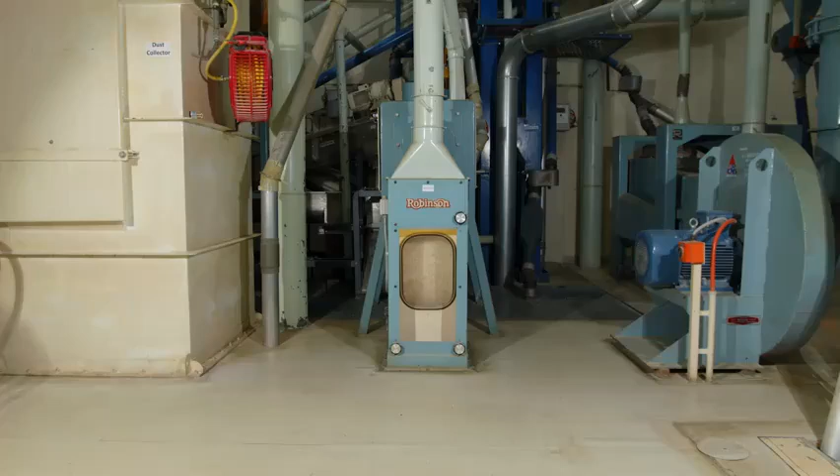Aspirators. In this chapter, you will learn about aspirators, what they do, how they work, different types and how they are adjusted, and how they are maintained. Aspirators are designed to remove lightweight impurities from the wheat. Lightweight impurities may include dust, chaff, and small or broken kernels.

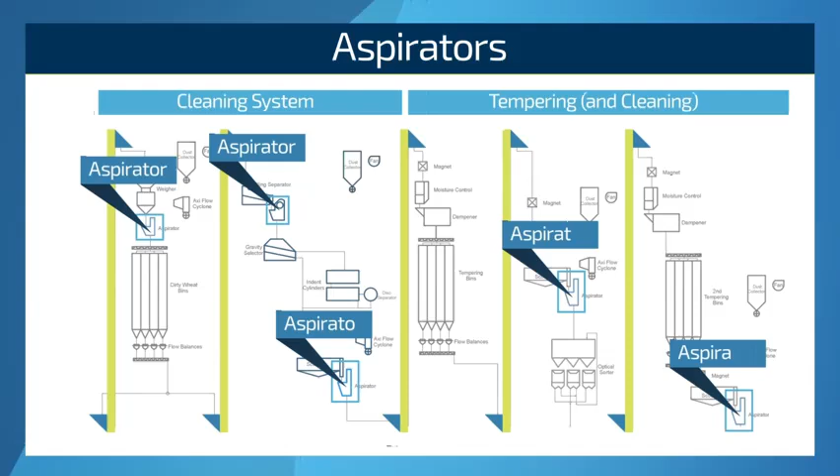Aspirators can be situated at several points in the system. At intake, aspirators are used to reduce the amount of dust released into the air. Aspirators are located directly following milling separators. They remove particles that are lighter than wheat, but similar enough in size to have avoided removal by the screens.

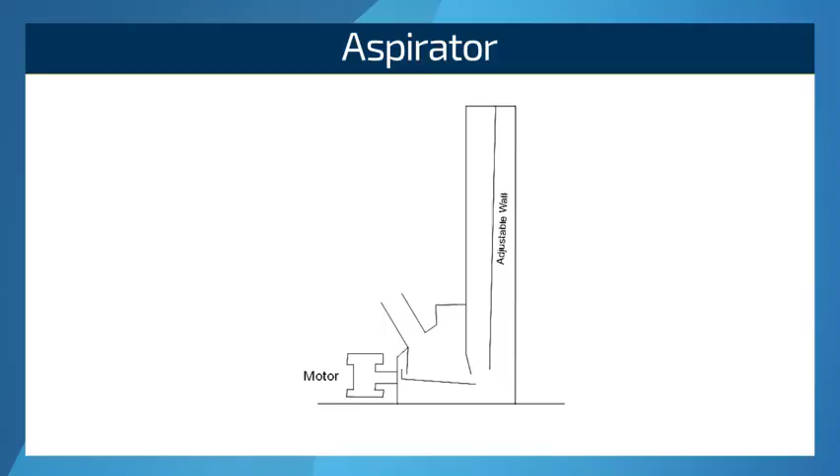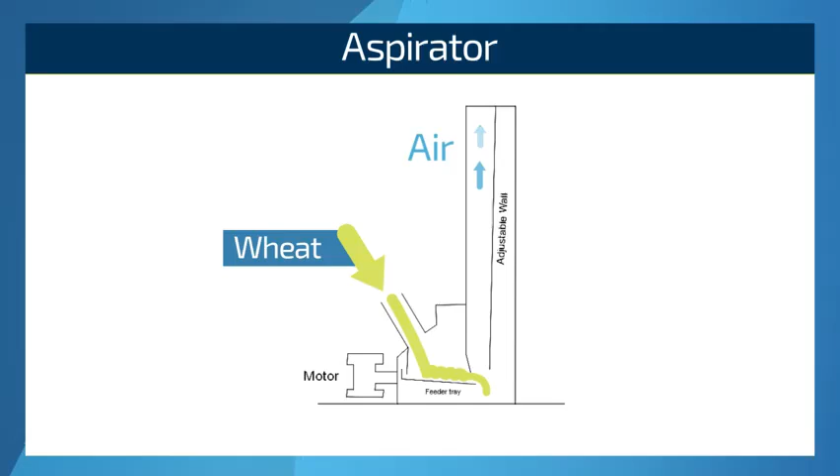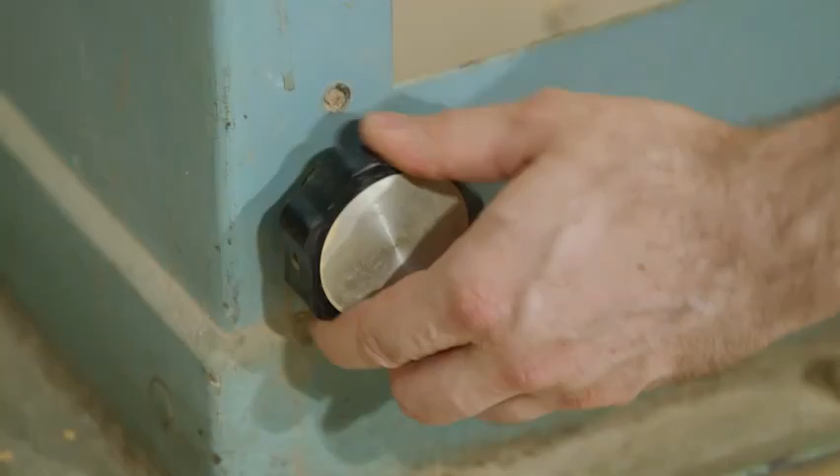Aspirators are also located directly following scourers, where they remove any dust, chaff, or kernel pieces generated by the abrasive processes. The wheat stream enters the aspirator and is spread out into a thin, wide stream, usually by a vibrating tray. The stream falls through a current of air that is travelling vertically upwards. The current is adjusted so that it is strong enough to lift anything lighter than the wheat out of the wheat stream, but not so strong as to lift whole intact kernels.

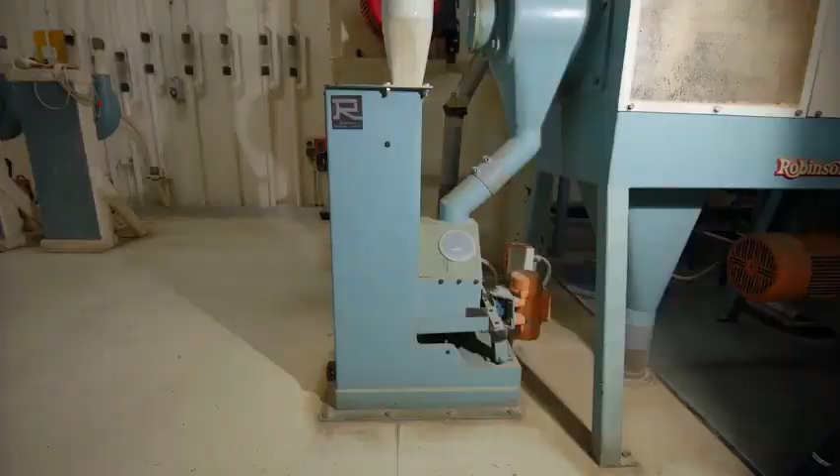In some types of aspirator, the feeder tray is held up by a spring or counterweighted gate. The force of the wheat against the feeder tray should push down against the spring or weight. Spring or weight tension should be set to ensure that wheat enters the air channel across its full width.

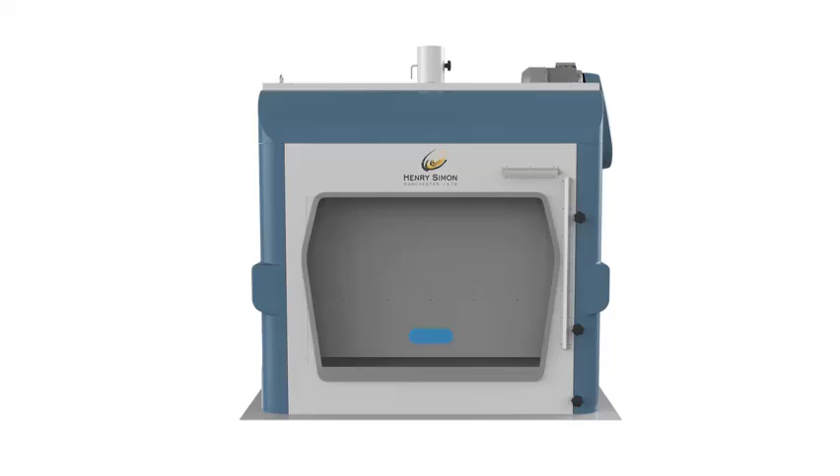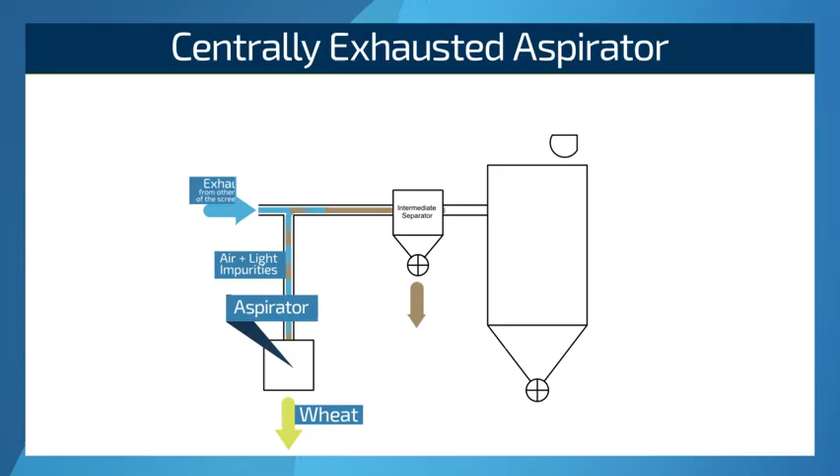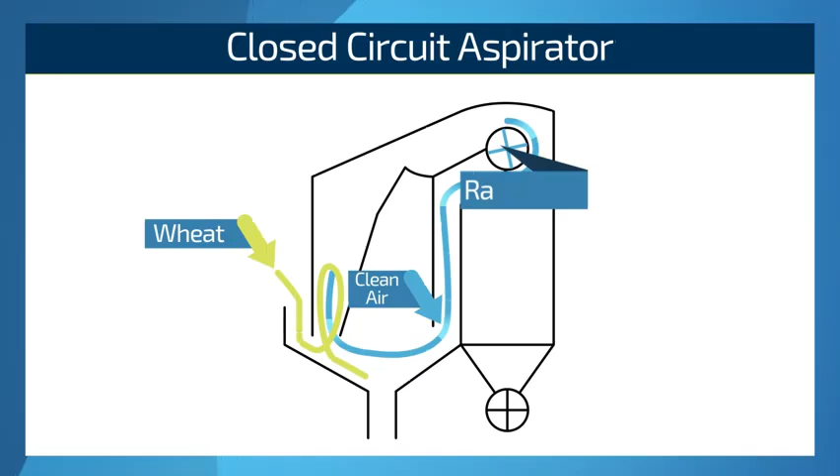Aspirators can be categorized according to how the air current is generated. Some types are centrally exhausted using ducting connecting the aspirator to a fan and dust collector. Others are closed systems and are exhausted by built-in radial fans, though they may also use some external exhausting.

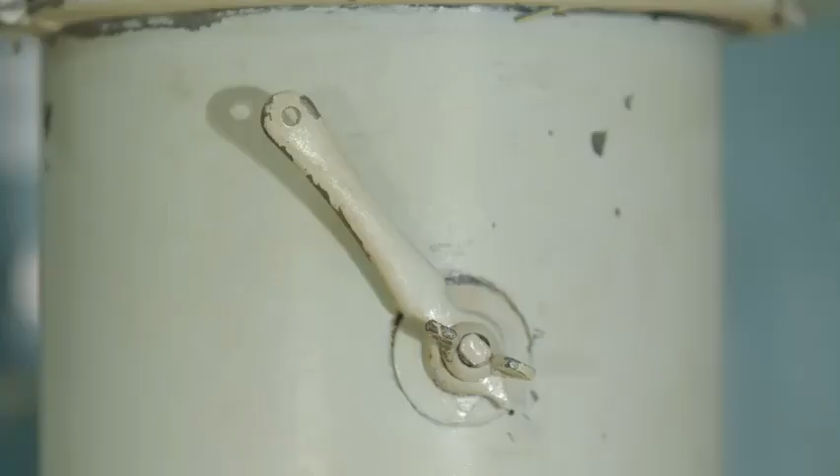In centrally exhausted aspirators, the volume of air used is controlled by a valve at the top of the channel. The speed of the airflow is also controlled by this valve, and by the position of an adjustable panel which acts as one of the four walls of the channel. The width of the channel is narrow at the bottom and wider at the top, causing the airflow to slow down slightly as it rises. The width of the channel at the bottom and top can be adjusted by hand wheels at these locations.

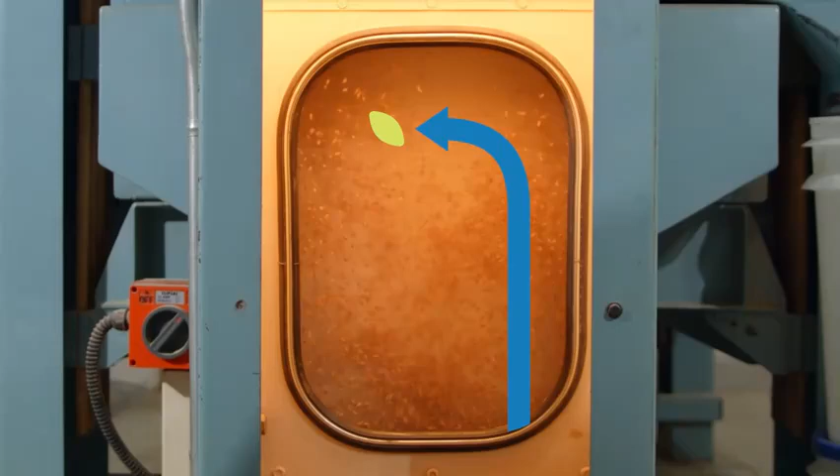Lightweight particles travel up and out of the channel and are separated out by intermediate separators, after which the air continues to a dust collector. Very heavy particles fall straight through the airstream. Most kernels should rise slightly at the base of the channel, but as the channel widens and the airspeed slows, these kernels should drop back down and out of the machine. This bubbling or cycling effect increases the efficiency of the aspiration.

The airspeed and channel width should be checked for each new grist, as changes in kernel sizes and densities may require different settings in order to maintain optimal cleaning efficiency.

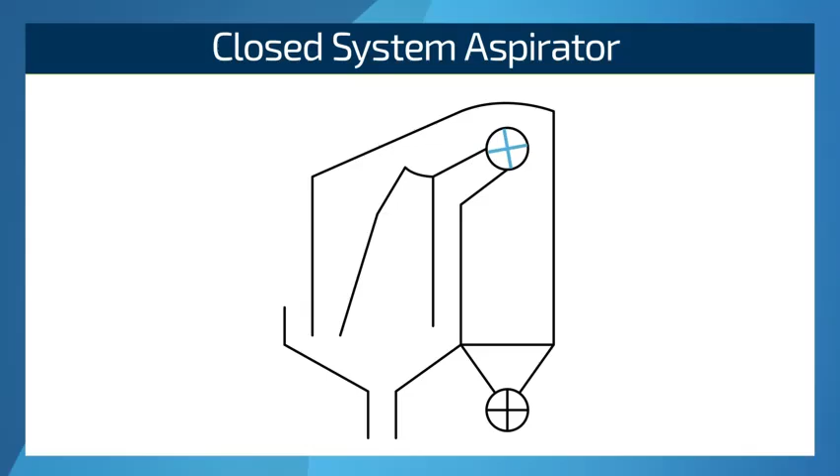Closed system aspirators with built-in fans may also have adjustable walls, but the light particles travel to an internal expansion chamber instead of an external dust collector. In the expansion chamber, the light solids are separated from the clean air. The clean air is fed back down to the base of the air channel to restart the cycle. The light solids are conveyed out of the expansion chamber by a screw feeder and an airlock.

The speed of the air current can sometimes be adjusted via a valve or by changing the speed of the fan, or by changing the width of the top and bottom parts of the air channel. The sound wheat falls through the air current and then out of the aspirator by pushing through a weighted outlet gate.

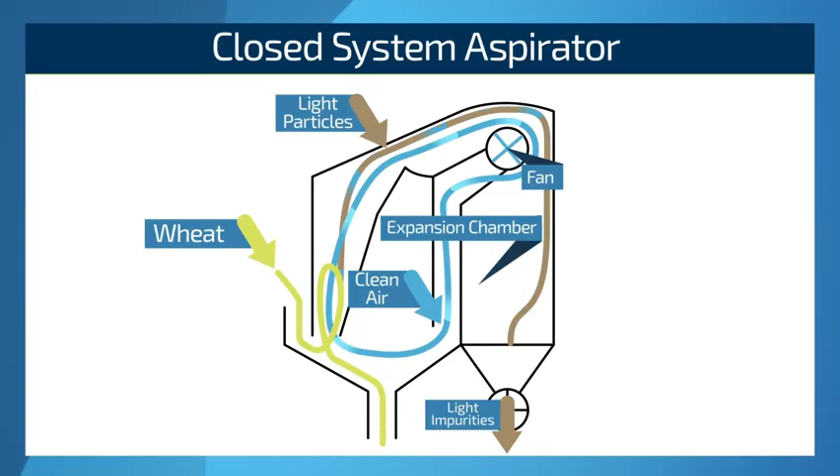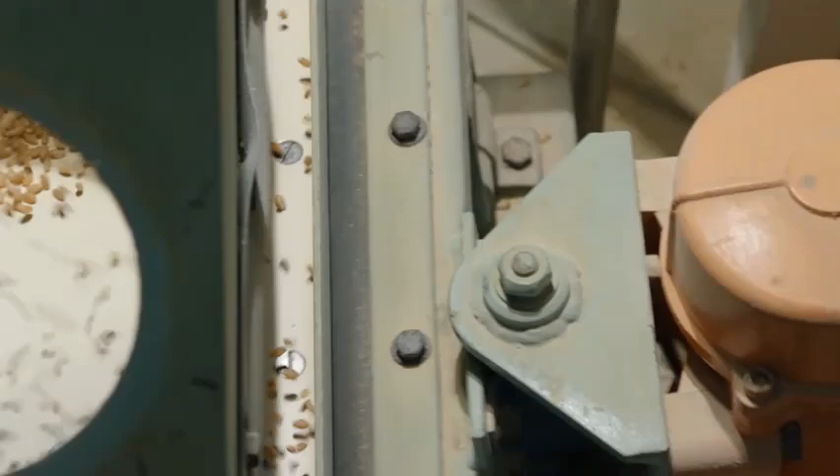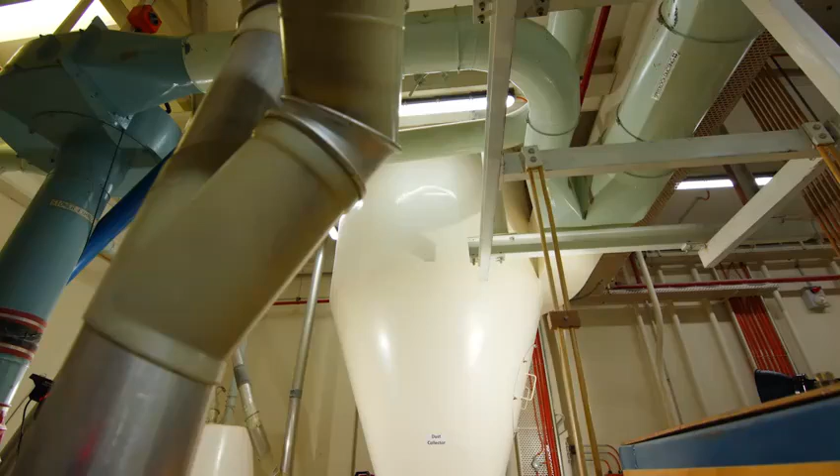Regardless of aspirator type, the condition of the feeder should be monitored to ensure that the vibratory motor is functioning properly and the springs have not lost their tension. Expansion chambers should be monitored to ensure chaff has not built up or blocked the outlets, as this could represent a fire hazard. The efficiency of centrally exhausted aspirators is dependent on dust collector efficiency. Therefore, dust collectors need to be well maintained.